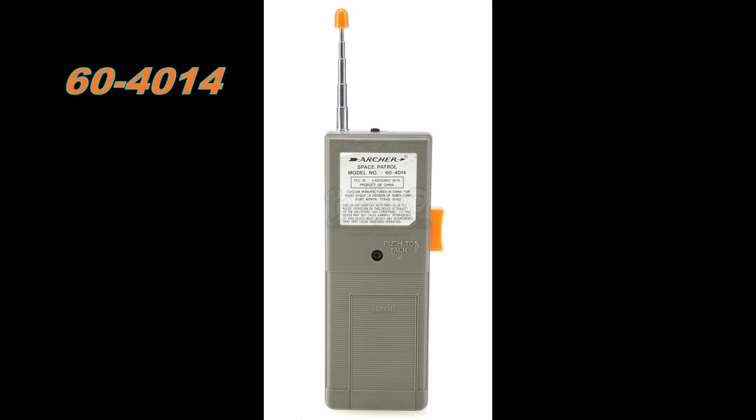These were genuine radios at the time, 49 meg kids toy radios with abysmal range, but of course, if you're accepting the time travel bit, you really have to accept the range that Doc and Marty appeared to get in the movie. Anyway, original versions of these go for a lot of money, £2,000 at auction, and anyone selling on eBay seems to want upwards of $200, which to ship them to the UK makes these very cost prohibitive for me for what is essentially just a child's toy.

These radios were manufactured by Radio Shack in the mid to early 80s and have been a successive range of radios under the Space Patrol brand for a number of years.

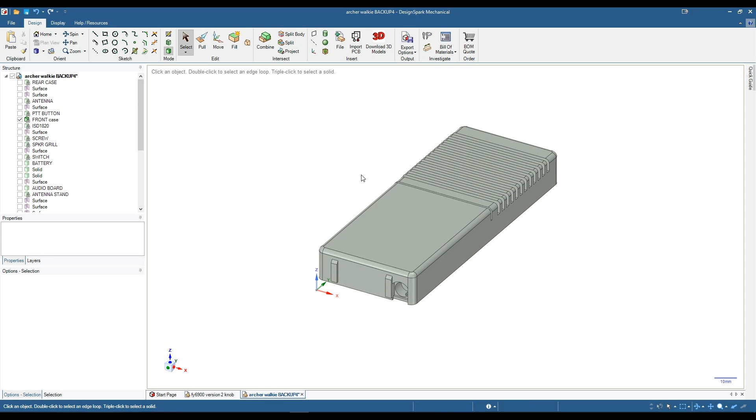So we fired up the 3D design software here, Design Spark, and based off of the photographs with nothing else to work off, I came up with an initial prototype for the unit.

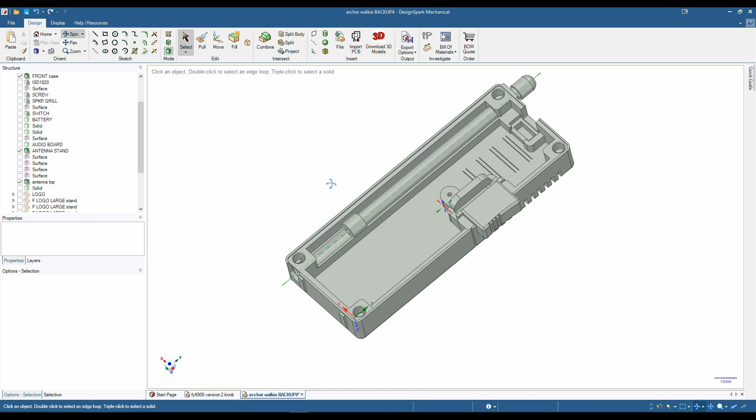Now, some of you keen-eyed folks would notice that some of the design cues from the original are not on this radio. This again was just a proof of concept prototype, but it looks very close to the radio.

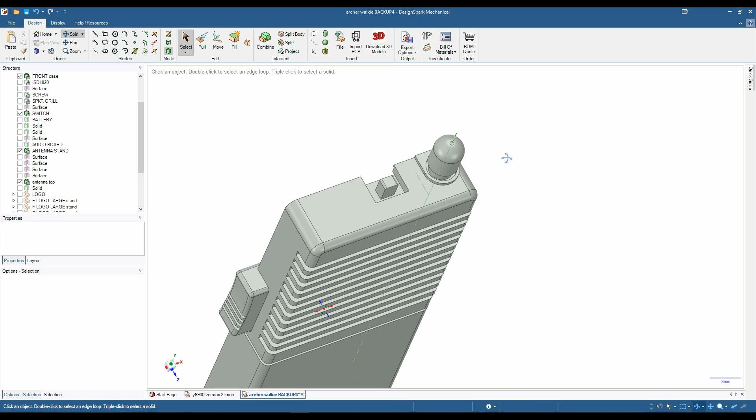I worked on the principle, unlike some of the props I'd seen advertised online that people have made, I wanted to make this more of a functional unit with a working push-to-talk button and a working on-off switch at the top. I also thought it would be fun to incorporate a few other electronic parts, which we'll see a little bit later on in the video.

The more I got into the design, the more I started to enjoy what I was seeing here and really sort of having a great deal of fun in making this look as close to the original as I could.

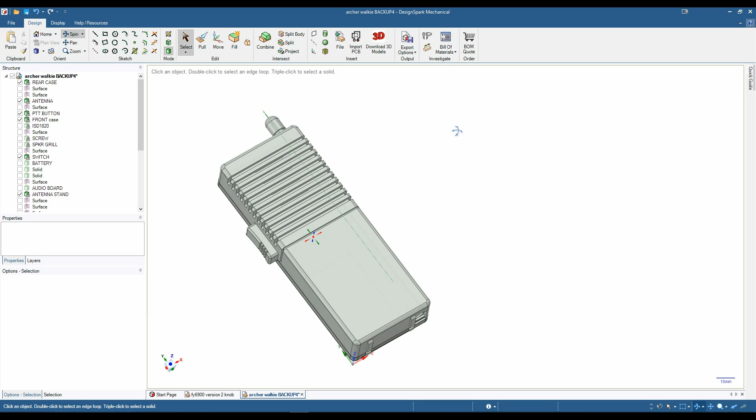But I also wanted it to be a sort of functional case that would be able to house electronics should I wish to put either a radio or other stuff in there.

So I spent some time in also making the logo there, the Archer Space Patrol logo. That took me some time to get right.

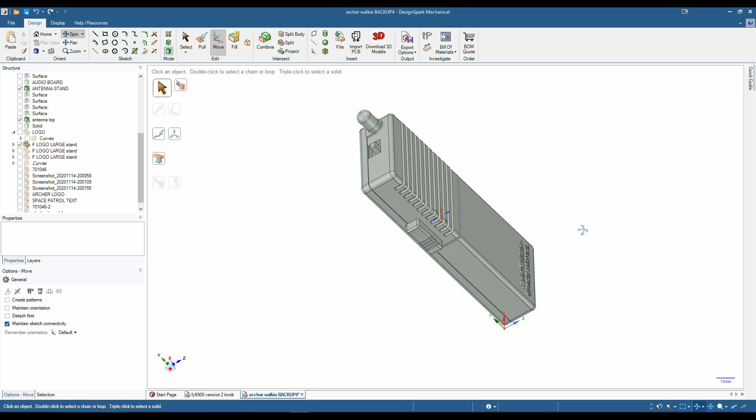I've got that in 3D, although the resolution of the 3D printer isn't really man enough to print that on the case. So I may well have to look into a resin printer if I want that to be a 3D part fixed to the front.

For now I've printed a label on the demo version of this, which you'll see a little bit later, and what you'll see now.

On the colour side of things, when you look through on the internet, there's various different colours of this radio. The ones they used in the movie were a much lighter grey colour, whereas the retail ones I've spotted were this type of colour. So I'm going to have to probably sit it somewhere between the two, maybe.

But I was really pleased with how this case came out. I even managed to get the holes in the grill for the speaker noise. And like I say, I've just temporarily popped a sticker on there for now.

The back piece, I'd run out of the same grey PLA, but the back piece also came out very nice with a nice finish to it as well.

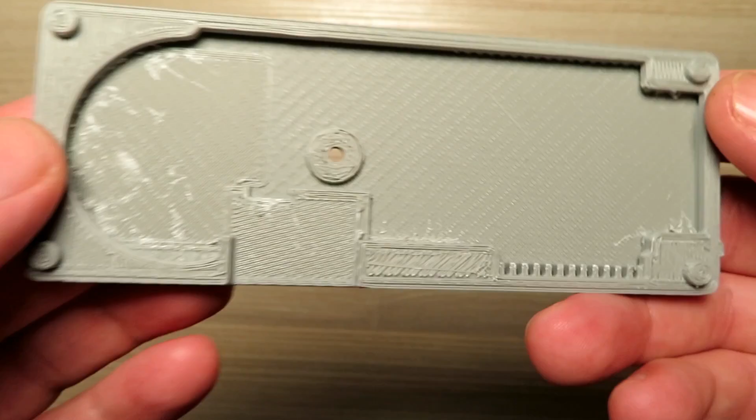And I made space out the top for the silver label. Now again, in the movie, the radios were seen with the silver label, but this label I've not seen on any retail versions. With that movie, there was a lot of brand placement, with Pepsi and things, so I'm wondering whether that was maybe the reason for that.

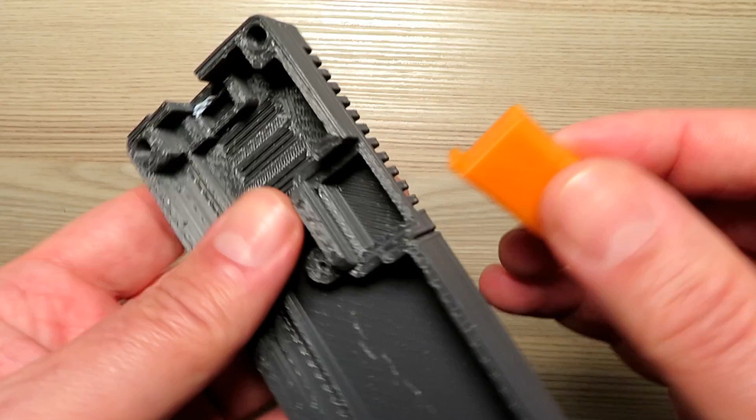Anyway, I got some orange PLA and made a PTT button, and this fits nice and flush in the case. The idea with this is so I can use it to either trigger it as a radio or to trigger it to make some sounds, which you'll see in a second.

On the next iteration, we should be able to put a casting in the case for a micro lever switch, which can be used for either a PTT button in the case of a radio or to trigger some sounds. I wanted a working on-off switch, so I found a spare one in the drawer, but I've ordered a packet of 10 so I can make a few of these up for friends.

I was really pleased with that and how that looked. I found an antenna that was just the right 6-section antenna as per the original radio, and it was of the correct length should I want to make this a 49 meg radio. That antenna stops at the correct height within the case on the antenna stop, and as you can see now, it's starting to look a little bit more like it.

I just presented up the two halves of the case together to see what it looked like, and it snaps together nicely with no gaps in the side. You often get warping with 3D printed parts, but I took some time to make sure that didn't happen with this one.

As you can see, it's looking pretty close, but not exactly as per the original. The one thing I wanted to do was to match this sticker, unlike some people online who just hand-drew stickers. It's got to look right. So I spent some time in Photoshop making the correct silver sticker for the back of the radio, so this absolutely does match the radio nicely. I think just the addition of that sticker makes all the difference to how real it looks. We're looking at the demo prototype here, very, very close to what I want.

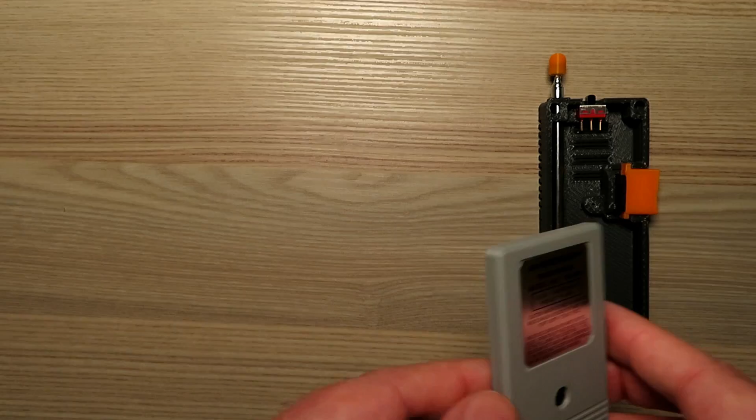Like I said, I did want a proper fixing screw to hold this unit together. If I do decide to sell a few of these items to the cosplaying community, I would like them to be robust and tough and not fall apart as soon as they were dropped. But that's not on the cards just at the moment, though I may well do that in the future.

This was really a fun toy to make for both of the kids, perhaps an early Christmas present or a stocking filler so they can play at being Marty and Doc - I don't know which one would be which. I've left a hole in the bottom for an antenna screw, should I need to do that. But one of the main tricks I wanted with this was to not be a dummy radio - I wanted it to actually have a fun side to it.

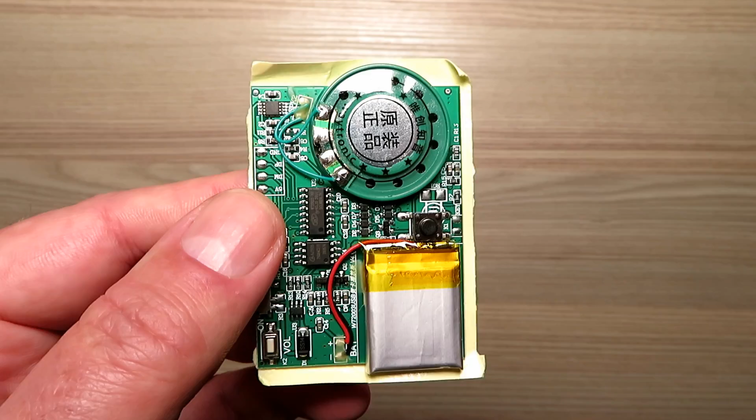What I found after a little bit of looking around was this programmable audio board which has the ability to play sounds, and I've put a few in there. It's got a side on-off switch, and I'm going to put a PTT wired to the onboard switch. I'll also mount it so you can charge it through the USB on the side of the case, so you won't need to take the case apart to charge it or to change the sounds.

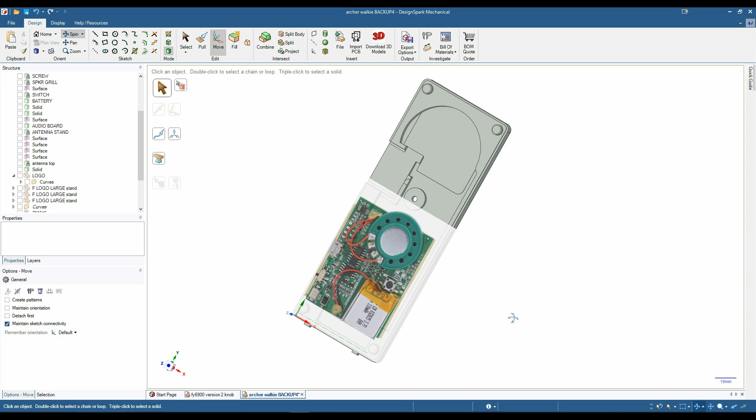I put that together in the 3D model just to make sure it would fit inside the case, and you can have a little listen to what it sounds like here.

Doc, you better back up. We don't have enough road to get up to 88. Roads? Where we're going, we don't need roads.

Next week I shall carry on with this video. I hope you've enjoyed this one, and we shall get further into hopefully finishing the radio, and I'll have something that looks pretty damn close to the original.